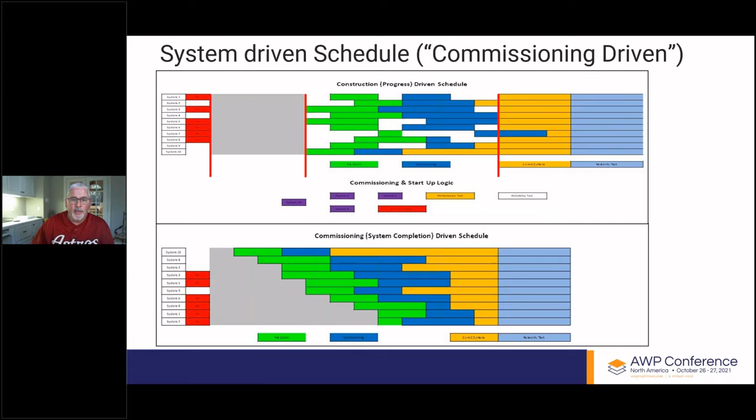My presentation focuses on the foundation for a smooth transition from area-based to system-based. I'm going to talk about the prerequisites to get ready for the smooth transition. First, tags and master code structures. Second, the master tag register. And third, critical transition points to control in MPC.

What we have been targeting is that we don't do things because we can, but we do what we should do. That means following the path of construction: do not proceed with the work just because we have enough material and drawings, or because we want to achieve earned values. Second, do we know exactly what we should do next? And third, how to determine priorities and sequences by AWP planning, and build and monitor the plan down to the tag level. Those are very important keywords.

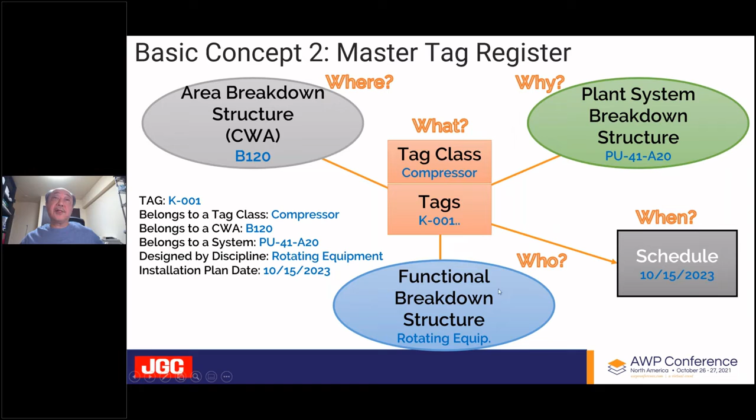Then after we schedule this, for example, installation, we're going to cover the last dimension of when. So say we have a K001 compressor tag that belongs to tag class compressor, which belongs to CWA B120, belongs to system PU41A20, and is designed by discipline rotating equipment. Okay, so this is a very simple foundation. I'm sure everybody is doing this. Lastly, this is scheduled to be installed on 15th October, 2 years later.

Okay, so now with the 3 dimensions, we can construct a 3D cube. As you can see, one axis, area WBS, explains where, functional WBS explains who, and system WBS explains why. Why means, why is a certain tag there? I'm talking about the purpose of the tag from an engineering perspective. For example, a pump serves to give pressure to the liquid or the line. So that's why I use the term why.

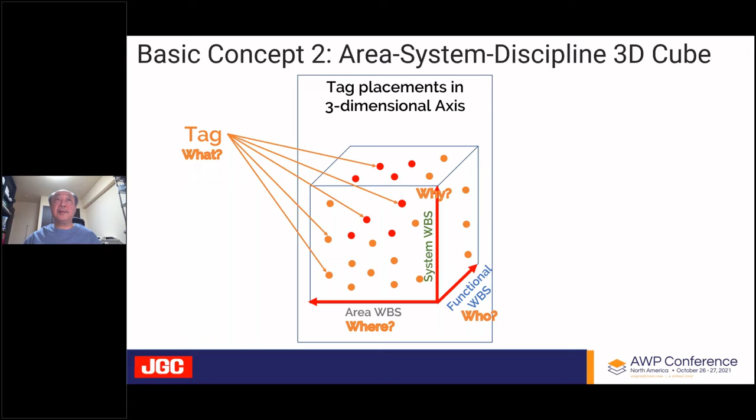Anyway, a lot of tags are actually placed in the cross section of these three dimensions. And then if we have a 3D cube, we have 3 planes. One is area versus system, second, area versus discipline, and third, system versus discipline. So tags are the common divisor for all the 3 dimensions.

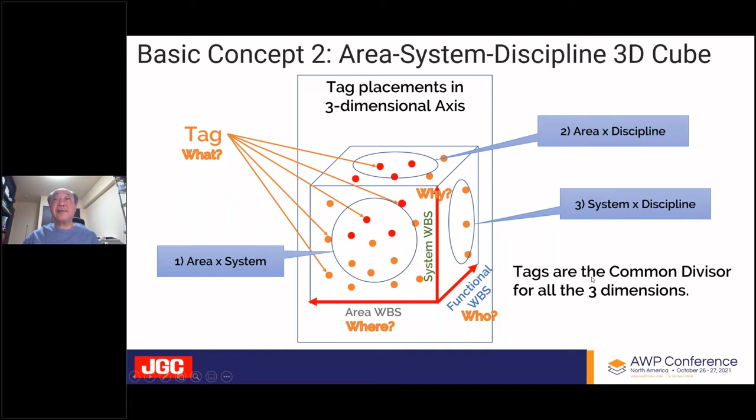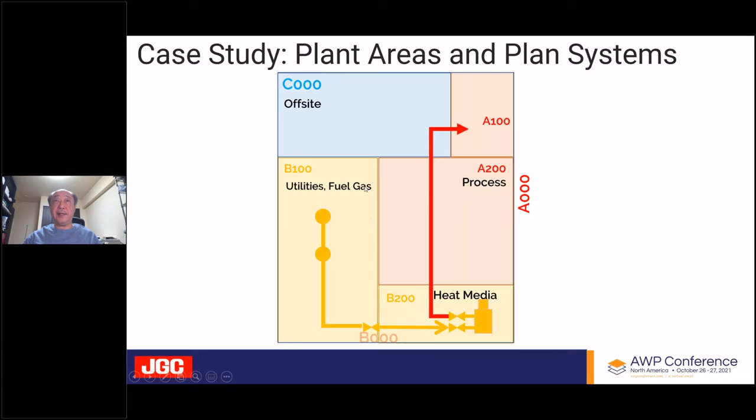Okay, now I'm going to talk about them one by one. So plant areas versus plant systems. This is an imaginary plant. As you can see, the areas are disassembled into 3 main areas, A, B, and C. And then the utility lines and process lines are designed like this. Each circle is representing a tag. So we have CWA, we have systems, and then we have tags.

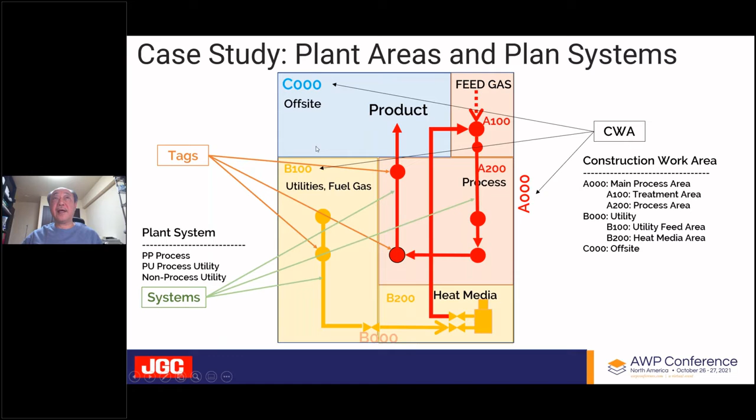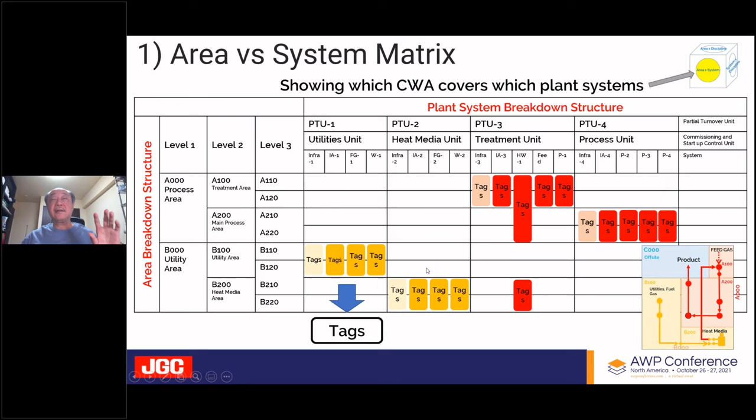Okay, now let's move on to the first plane, showing which CWA covers which plant systems. You can see this. I just put the small picture here. This is a matrix, and all the tags are placed into certain cells. So this means tags are the common divisor. Second plane is area versus discipline.

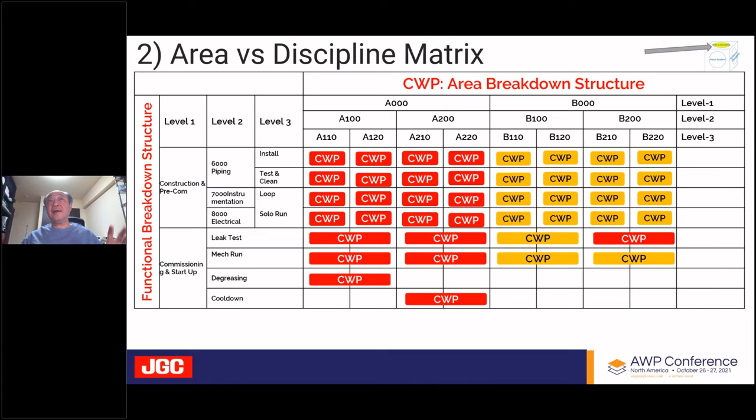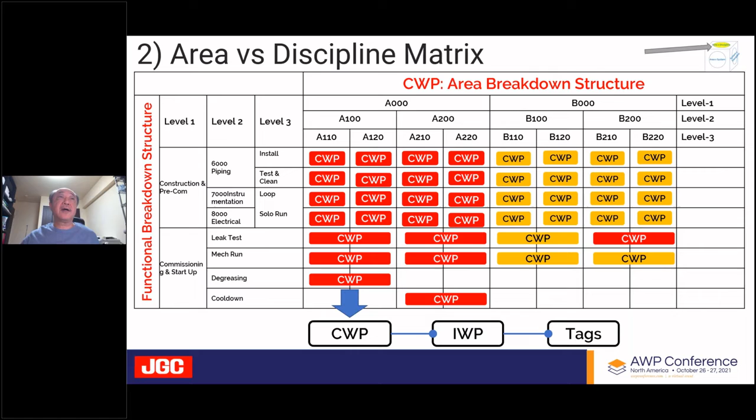Okay, now CWP is at the cell of the cross section. CWP is broken down into IWP, which has many tags. So if you name one tag, you know exactly which IWP and which CWP this tag belongs to, and which area and which system, or which functional breakdown structure.

The last plane is system versus discipline. Okay, now we have lots of system work packages. One system work package belongs to one plant system breakdown structure and a functional breakdown structure. Now SWP has lots of tags. Again, if you pick up one tag, you know exactly which system work package has this tag.

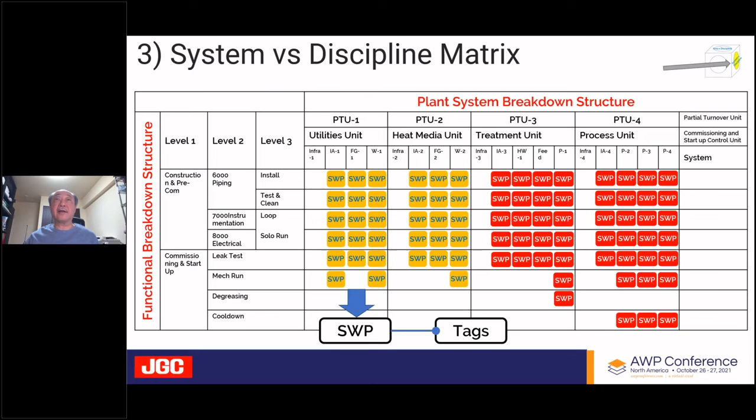Okay. Now, after I talked about these 3 dimensions, 3 core dimensions, let's look at critical transitions in EPC phases. Okay, here, the above portion is more system-based, the bottom is more area-based. Engineering starts from process equipment, and so on. This is a very rough flow, and then construction, startup, and O&M.

As you can see, engineering starts with a system-based concept and moves down towards the area-based. In other words, it starts with the conceptual and then moves down to the physical. And after they finish layouting, piping and civil, then we start construction. So as you can see here, area-based engineering and area-based construction, which is the starting point, is a very critical point. And then moving upwards: piping, equipment, pressure test, loop test, commissioning, and turnover as system.

Okay, this is actually very similar to the V development concept, which can be used for software engineering as well as construction. Now I point out the first critical point, which RT 364 actually explains. We have to have SWP in mind first, beginning with the end in mind. Then planning, back casting to CWP, back casting to EWP, then executing the other way.

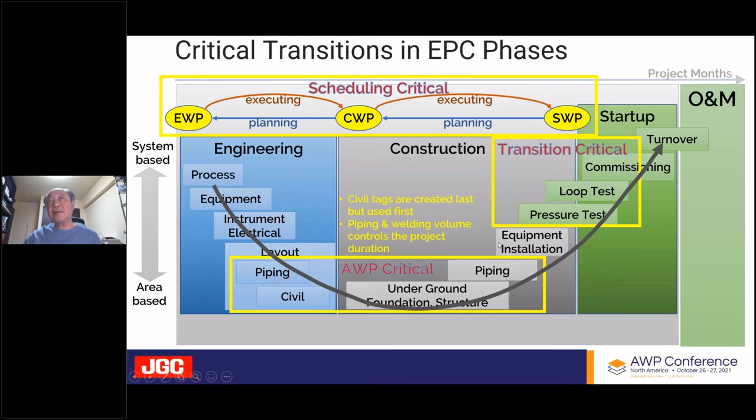As Jay pointed out, this point actually occupies another 50%, even though the progress achievement is not as much as the previous one. That means we can do the very bulky work here, but when we move upwards, each system must be complete in a very precise way. We cannot have any leak. Just one leak is not allowed. So that's why we have to be very careful. But at the same time, progress is very slow, which we would like to improve.

Now I talked about these 3 dimensions and critical points. So our solution in JGC is building a tag master, which contains all the tags. Sometimes a huge project contains 500,000 tags or even 1 million tags. As soon as engineering starts, or even from the FEED phase, we start building the tag master. It starts with equipment tags, then moves on to instrument, electric, and finishes with civil and piping.

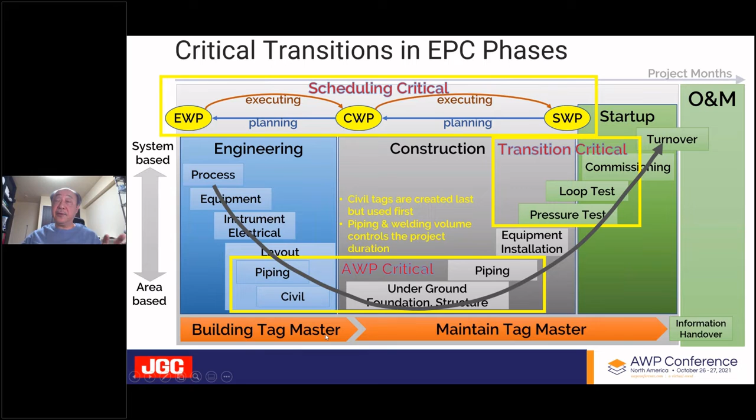Of course, engineering has a lot of changes, so we have to incorporate all the changes into the tag master. And then we have to keep maintaining this tag master until the end. This is the key, in our opinion, that we keep track of all the tags. That means each tag contains CWA, plant system, and functional breakdown structure, as well as schedule. This is the key information to support smooth transition. With this, we can feed enough information to the construction and commissioning startup people.

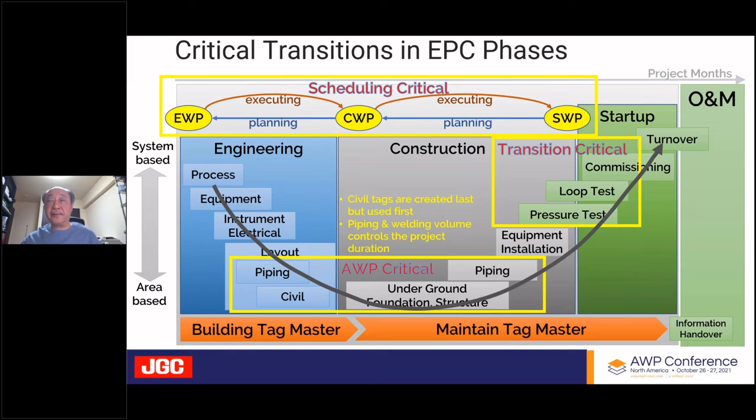In summary, I explained 3 master code structures. All of them are hierarchical and include CWA, plant system, and disciplines. Each tag carries those 3 applicable codes and attributes. Second, we keep a master tag register. Tags are the common divisor of construction area, systems, and disciplines. Every tag resides in the cross sections of a 3-dimensional cube. Each tag is bound to EWP, CWP, and IWP.

I didn't talk about PWP, but it's also bound to PWP with the delivery information. And tag completion statuses, planned and actual, can be provided either area-based or system-based anytime you want to see. That's very important. At least people know which system we can actually start first or get ready by when.

Then I mentioned 3 critical points. One is scheduling criticalities, milestone control by backcasting. This determines turnover priorities. Second, critical paths of area-based engineering, civil and piping, to construction. We often fail to even start AWP just because civil tags are not ready when we want to plan civil works in the construction phase.

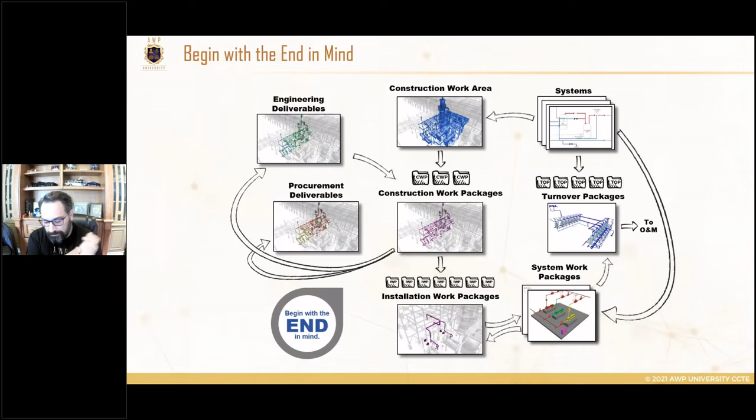As I'm clicking away. All right, so this is just a real brief little diagram that comes directly from the research, just to show you what I've been saying, the multiple different IWPs, and how those multiple different IWPs or portions of those IWPs contain that turnover documentation and roll into each of those SWPs, if you will. And this is a little bit misleading possibly because it's not the entirety of each IWP, as I've said multiple times. It's portions of those IWPs that will make up the entirety of that SWP.

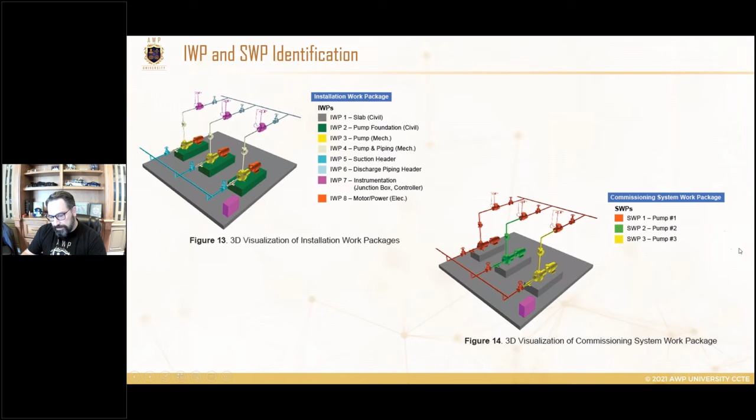So it gives us a much more granular control and tracking against our commissioning. And that's what this is really all about, right? Today, especially our conversation here, we're ending out the day with commissioning. How fitting is that? So we need to identify how and what the best and most efficient way is to tie our IWPs to our turnover systems, hence enter the SWP.

All right, so next slide. We've talked about, and I've said it, and I'm going to keep saying it, portions of IWPs rolling up to SWPs. This is a good representation that comes directly from the 364 materials that shows kind of that quilt of mapping between IWPs and the SWPs, so that we can see very clearly that we're going to scope our IWPs based on the way we're going to build this thing. We're not going to scope it based on other influences.

The most efficient way for that crew to actually execute that IWP is the way we're going to build the IWPs. Thus, we're going to cross constraints of SWP. So you can see that IWP1, portion of it makes up SWP1, a portion of it also makes up SWP2 from at least a constraint point of view, and the execution of IWP2 and IWP3 as well as 4, or portions of those, make up the SWP constraints.

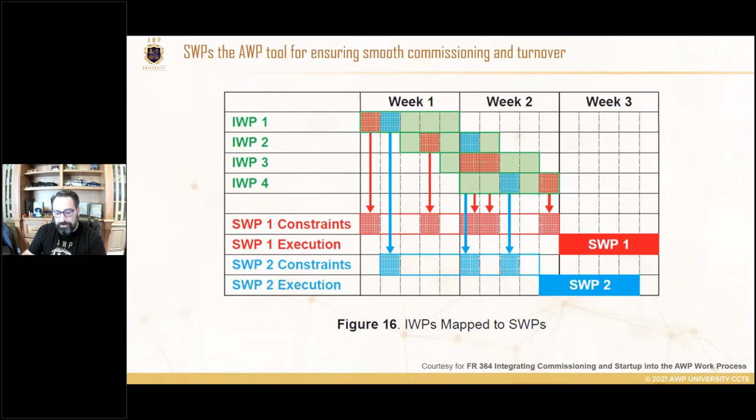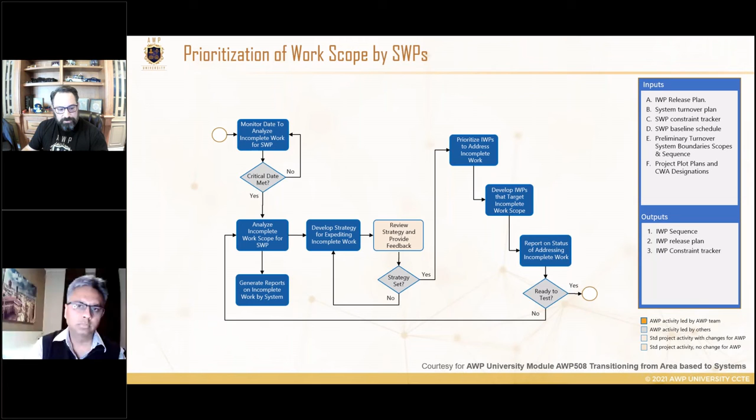So with that, I will turn it over to our next presenter, Yogesh. And Stephen, if you could advance, and I guess Yogesh, you're going to share your own. So take it away, my friend. Thank you. Just sharing my screen here quickly. Are you able to see my screen? Assuming it's a yes. You're good. You are. Yeah, you bet.

Good. Thank you. So yes, now that you know from an owner's perspective why this last bit is also quite critical, Mick explained the philosophy behind it, the coding structure and how it all gets done. And Robbins also explained the framework within which CII has put this all together in a very systematic way. Since the beginning, when we coined the AWP, the end in mind was commissioning and startup.

And as Mick talked about an area-based work breakdown structure and a functional control work breakdown structure, I think it's a similar way I'm presenting to you, but I'm going to share with you the execution part of it. Now you know the theory, the best practice, but taking an example of how this gets done digitally in an execution sense.

Because quite often, otherwise, when you look at commissioning, it seems like another big vault of data with all kinds of checklists populating it one by system, and comes so late in the game. So how can we execute this in tandem with the area-based construction? That's where I'm going to give you a little bit of a journey based on some practical examples.

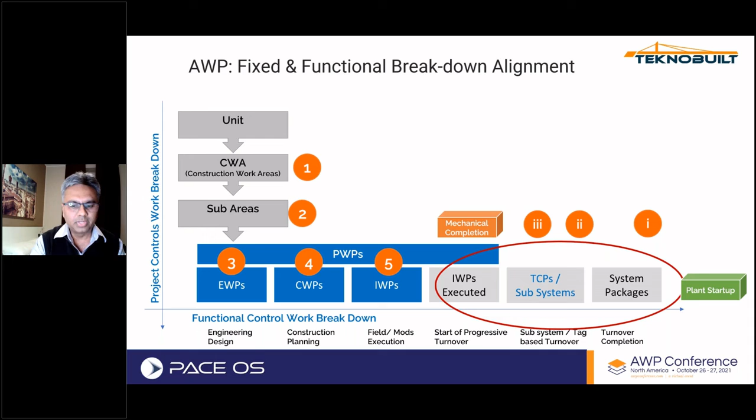So what we focused on is, as you see, the area base 1, 2, 3, 4, 5 gets me till the area base built for by IWPs. But what's important also, based on the plant startup, is the definition of system packages and the turnover commissioning packages or the binders, within which I believe the system work packages are a subset. These are the ones which have to be thought out early in the project. And the boundary definition, how many commissionable, non-commissionable for process, for electrical, for instrumentation, etc., and the coding structure, needs to be arrived at early. So this is what you already understood from Mick.

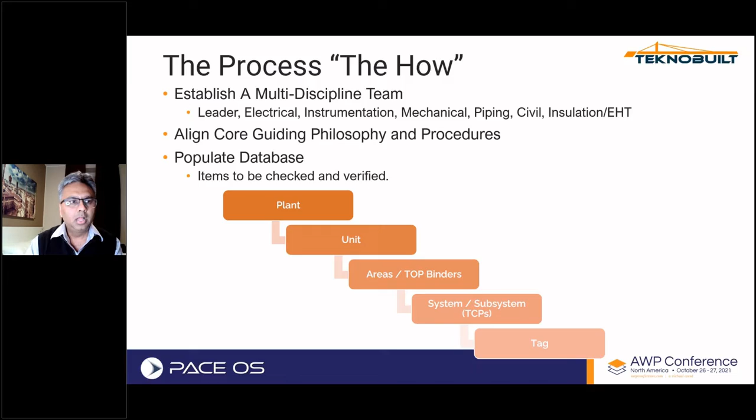But when it comes to really doing this, that end in mind should also be right in front of you, the end in sight. The earlier you start with seeing what commissioning in terms of the system and subsystem has created as boundaries, how many of them are there, how have they grouped it, and what will be the TCCC point. If that is in front of you in an integrated manner within your area-based execution system, sorry, keep messing this. Okay. That is where you are able to start seeing the end in mind to end in sight.

So one important part is to establish the TCCC. What will you turn over? Is it at construction complete or mechanical complete, or do you have an integrated team which involves the pre-com and then you will turn over? Establishing this orange flag of the TCCC is a very important step early in the game, because there is organizational complexity. There may be people from another party, a third party, owners team, etc., that become part of this.

So establishing that is an important part, and along with that, a very essential element is the safety in transition from where you are in a greenfield type construction environment, but now you're going into a safety in transition type of role versus full operating permit that is required when you're moving off into the next stage.

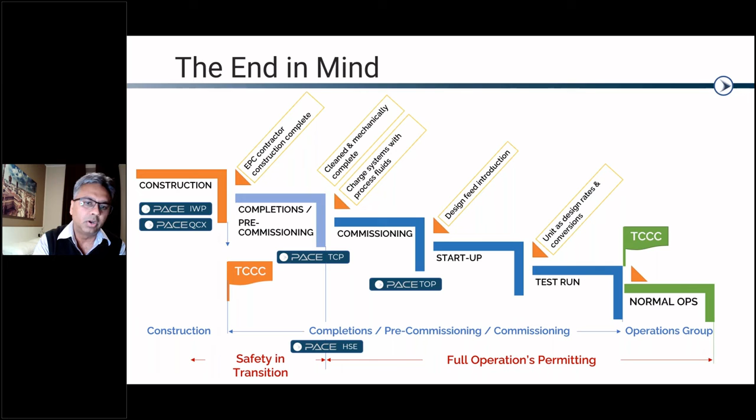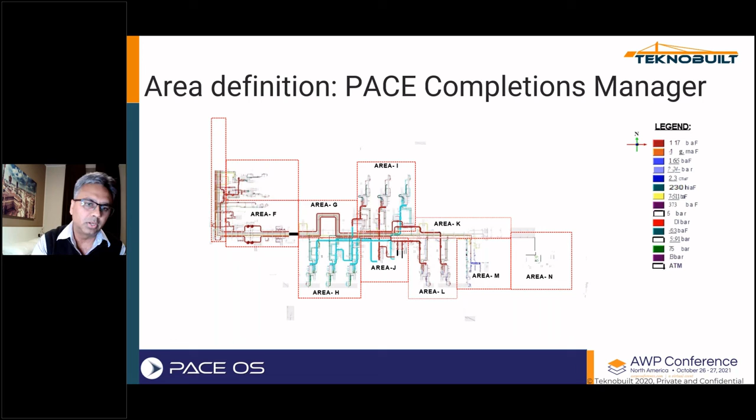So important is also, as you did your path of construction early in the project, where you defined the boundaries of what is a CWP by an area, etc., that you start establishing a definition at a higher level. What will be your boundaries? Quite often it might be by systems, by pressure rating and others, depending on the discipline you're involved in. You carve out what will be your high level boundaries, and of course down within there you get to the next level of the subsystem level test pack definition.

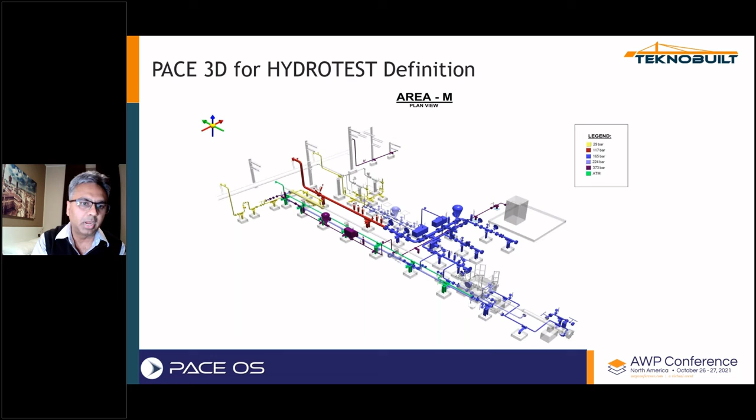Again, the 3D modeling tool which we are using also allows you to start selecting and identifying the breakpoints from where to where you are creating your test packs. And a correlation between area to subsystem, as was illustrated earlier, is quite easy if you follow the scheme as Mr. Mick mentioned. You can quite soon start correlating which engineering is done by system until you go to other disciplines, and very quickly start establishing the correlation between area-based EWPs to the system or subsystem. And when it gets to the when aspect of it, the 5 dimensions shown earlier, you start visualizing when these things are to be turned over and what will be the period when this will be done.

So at the end of the day, from digitally managing it, you have got the installation work packages where you're finishing the IWPs, but at the same time, there are many supporting things required in terms of safety, permit services, and equipment to basically open up what we call the turnover commissioning package module, where you're managing the safety and other things and taking it all the way into the registers where all the information is finally documented. So quite important in this whole process is also to have visibility to a punch list, an integrated punch list as much as possible.